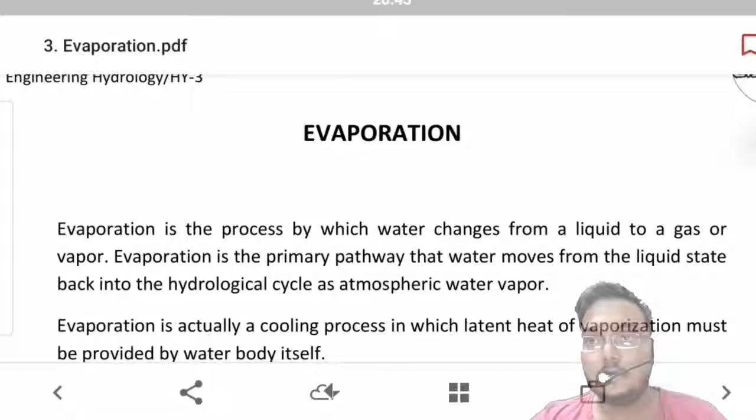This is the fourth part of the video, dealing with another topic of hydrology: evaporation. In the first video we started with an introduction to engineering hydrology, covering all the aspects dealt with in this field. In the second and third videos we studied precipitation and related topics. Now, in this fourth video, we will start a new topic: evaporation.

Evaporation is the process by which water changes from liquid to gas or vapor. Water from any surface water body will try to convert itself from the liquid form into vapor form, rising up to the atmosphere to form clouds. This is our process of evaporation, by which water changes from a liquid to a gas or vapor.

Evaporation is the primary pathway by which water moves from the liquid state back into the hydrological cycle as atmospheric water vapor. Out of all the methods by which water can transform from liquid to vapor into the hydrological cycle, evaporation is the primary one. It can also occur through other processes like transpiration, but evaporation is considered primary because it occurs mostly and in large volume.

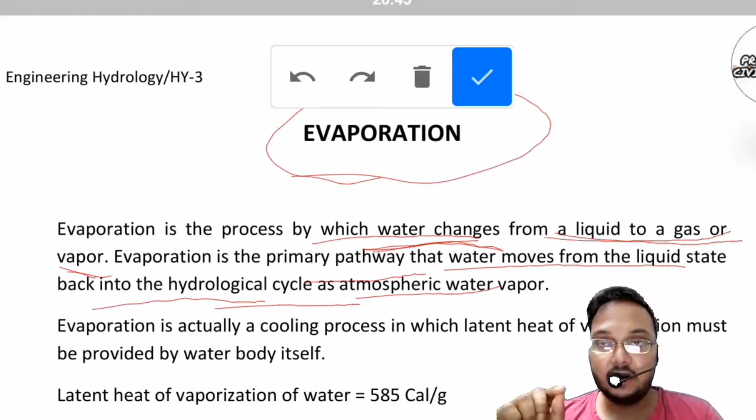Evaporation is actually a cooling process, in which the latent heat of vaporization must be provided by the water body itself. This latent heat of vaporization helps the conversion take place from liquid water to water vapor. That latent heat allows the conversion from the liquid state to the gaseous state, and this latent heat is provided by the water body itself.

The latent heat of vaporization of water is 585 calories per gram. You can remember this value.

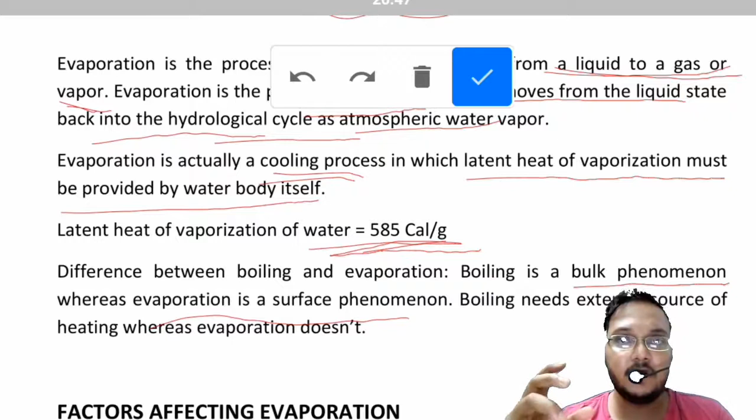The difference between boiling and evaporation is that boiling is a bulk phenomenon - it occurs as a whole. If you put a vessel full of water on a gas oven and light it up, the whole system will be exposed to boiling. Whereas for evaporation, it is a surface phenomenon - it's not that the whole of the ocean water starts evaporating; it only occurs at the surface. For boiling, it occurs in the whole vessel, in all the water present in it. So boiling is a bulk phenomenon, whereas evaporation works only on the surface.

Boiling needs an external source of heating, whereas evaporation doesn't. In boiling, some external heat is required - you need to light up something beneath the vessel so that the water starts boiling. Without that fire, you cannot start the boiling process. Even if you use an induction oven instead of fire, you need to set the right temperature and supply heat from the pan so that boiling takes place in the vessel. But for evaporation, we don't need any source of heat - no external heating is required. You may say that evaporation occurs because of the sun.

No, it's not the right thing. Evaporation also occurs in the night time, not only in the daytime. Even at night, if we keep our clothes for drying outside on our terrace or somewhere, that drying will take place at night too, irrespective of whether the sun is present or not. That evaporation process will also occur.

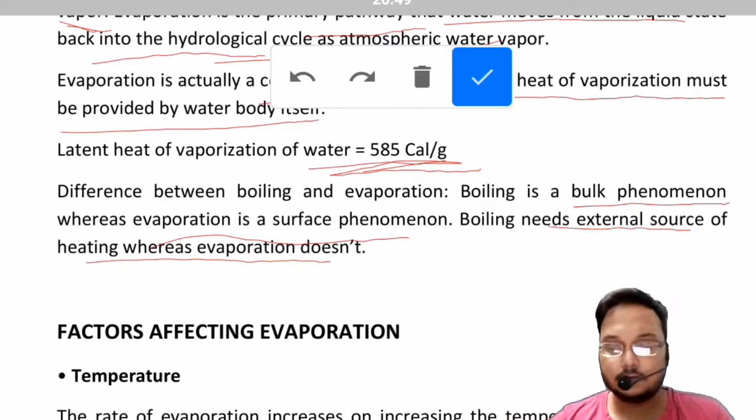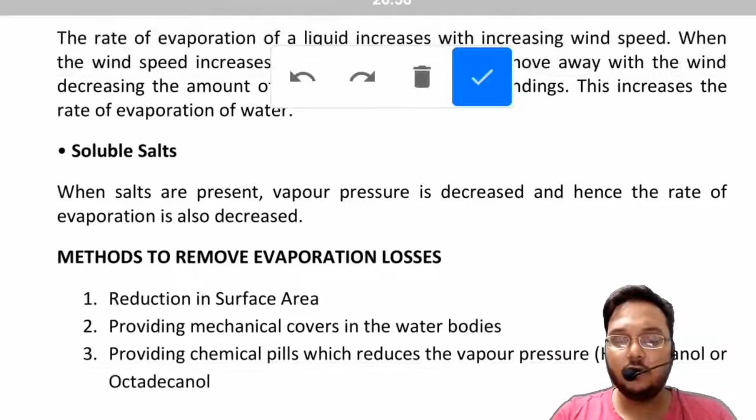So next we discuss the factors affecting evaporation. The factors that affect evaporation are the temperature, surface area of the liquid, humidity of the air, wind speed, and some soluble salts. You should remember these 5 factors which will actually affect the evaporation. How will they affect it? Now let us read about them in detail.

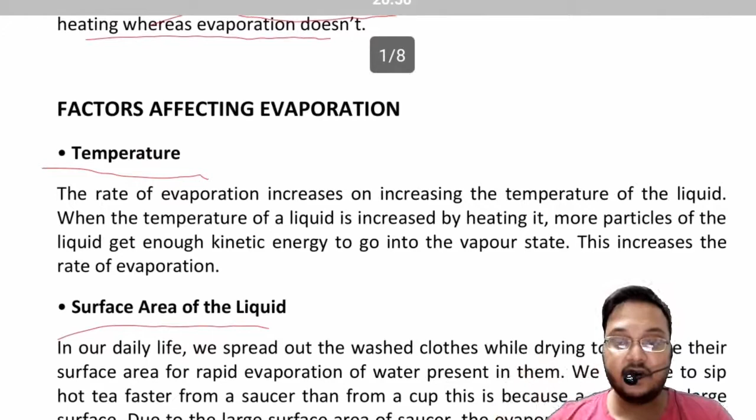For temperature, the rate of evaporation increases with increasing temperature of the liquid. So if you increase the temperature of the liquid, the rate of evaporation will increase. Just as I said, in the daytime the rate of evaporation is higher compared to night time. Evaporation occurs in both day and night, but it occurs more in the daytime because we have an external heating source, the sun.

When the temperature of a liquid is increased by heating it, more particles of the liquid get enough kinetic energy to get into the vapor state. As you know from school chemistry, we need to provide some kinetic energy to convert a liquid form to the gaseous form. Gaseous forms have higher kinetic energy, but due to the heating, the particles will already have some kinetic energy.

So just a little bit of heating will lead to much more evaporation compared to what happens in the absence of heating or at a lower temperature. The presence of high temperature will imbibe a little bit of kinetic energy, so that the particles can easily go to the gas state, and that amount of kinetic energy is easily achievable for the particles of that liquid. So temperature gives kinetic energy to the particles.

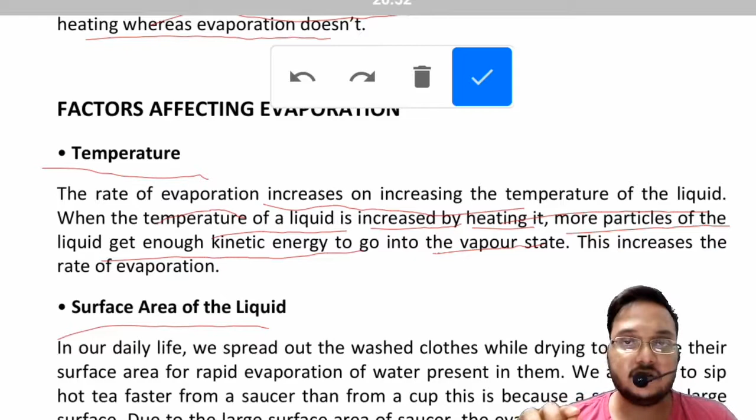Next is the surface area of the liquid. In our daily life we spread out washed clothes to increase their surface area for rapid evaporation of water present in them. We are able to sip hot tea faster from a saucer than from a cup. This is because a saucer has a larger surface, and due to this larger surface, the evaporation of hot tea from the saucer is faster.

We conclude that the rate of evaporation of a liquid can be increased by increasing the surface area of the liquid. So you got two examples: if we spread out our washed clothes, they will dry up quickly. It's not like you just keep them jumbled in one place, not spread out properly, and expect them to dry faster. No, that won't happen. To make the cloth dry faster, you need to spread it out.

Also, if you take hot tea in a cup, you will feel the heat. But if you pour the same tea into a saucer, a plate, or a china dish, and try to drink the tea from that saucer or plate, you will see it is easier for you and you will feel less heat. This is because with more surface area, more will be the rate of evaporation.

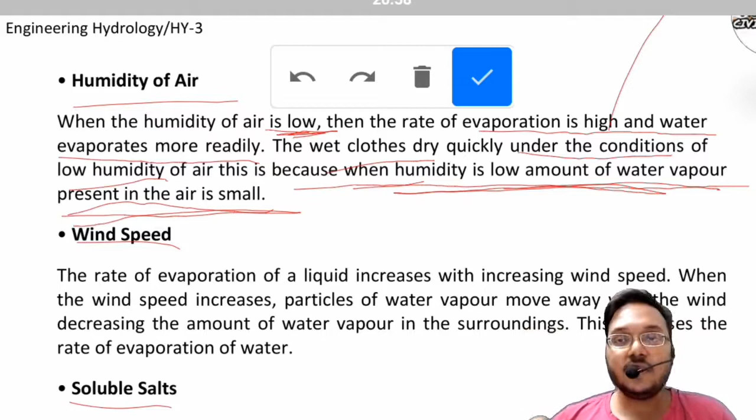Next is the wind speed.

The rate of evaporation of a liquid increases with the increase of wind speed. So if the wind speed increases, the rate of evaporation will also increase. When the wind speed increases, the particles of water vapor move away with the wind, decreasing the amount of water vapor in the surroundings, which increases the rate of evaporation.

Suppose some amount of evaporation is taking place in a particular region, and there is some good amount of wind flowing in that place. The evaporated water vapor won't be able to stay in the atmosphere for longer time, as the wind will blow it away. The higher the speed of wind, the higher the amount of water vapor blown away. So when the water vapor is blown away, the atmosphere will again be vacant, devoid of water vapor, so the evaporation process will continue.

But suppose the wind is blowing at a very low speed, like 1 to 3 kilometers per hour. What will happen? The water vapor coming to the atmosphere from evaporation will remain in that part of the atmosphere for a longer time. But if we have a wind speed of around 30-40 kilometers, a very windy day, that wind will blow away those water vapor particles, creating space again for new water vapor particles to take their place. So we will have more evaporation than would happen on a less windy day.

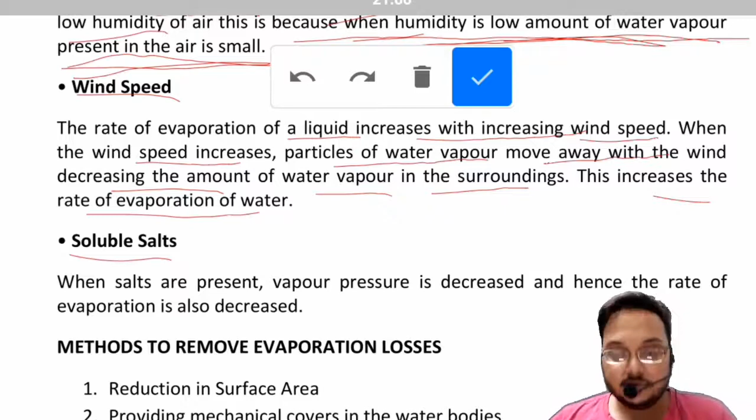Next is soluble salts. When salts are present, the vapor pressure is decreased, and hence the rate of evaporation is also decreased. So the presence of salt will decrease the vapor pressure, and thus the rate of evaporation will also get decreased.

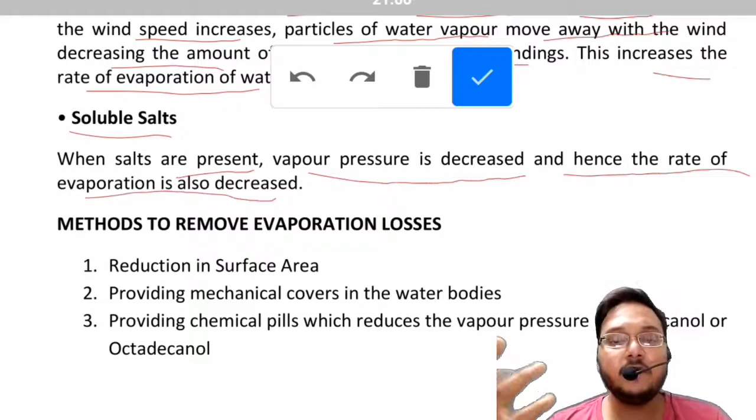The methods to remove evaporation losses are: either you reduce the surface area, as we have learned that more the surface area, more will be the evaporation taking place. So if we reduce the surface area, we can reduce the evaporation losses.

Next, providing mechanical cover for the water bodies. If we want to minimize evaporation loss from a very large water body, a huge amount of water vapor will get evaporated. So what we try to do is make an open tank in such a shape that the top part has less surface area compared to the bottom part.

Just like a frustum of a cone. If an open tank is made like a frustum of a cone, the top will have less area. I'll make a diagram of the frustum of a cone. This top part will have less surface area compared to the bottom, so less evaporation will take place from here. But if it was a cylindrical tank or a well, more evaporation will take place, as the surface area is more.

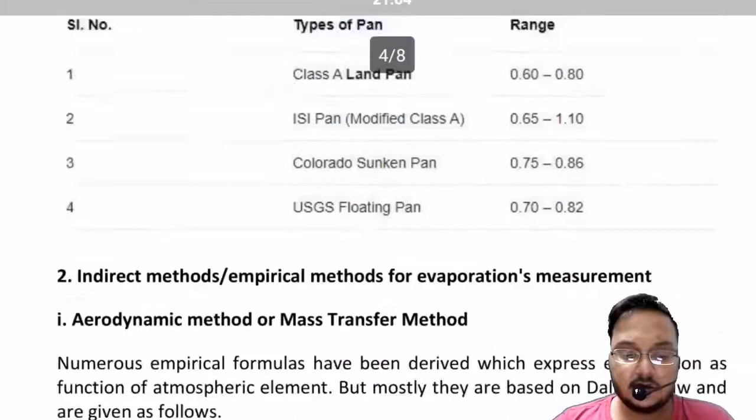The methods to determine the evaporation are as follows. The two methods for measurement of evaporation are the direct methods and indirect methods, and also there is one method, the empirical method. Let's make it three methods that will help us determine the amount of evaporation taking place.

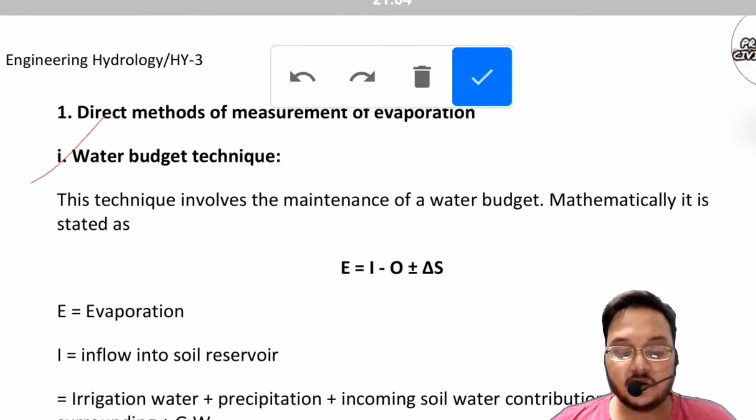We have this equation where E is equal to I minus O plus or minus delta S, where E is the evaporation.

I is the inflow into the soil reservoir, which is equal to irrigation water plus precipitation plus incoming soil water contribution from surrounding, plus the groundwater. So what all possible inflow can occur to a reservoir?

First is the irrigation water coming from irrigation sources. Secondly is the precipitation that is occurring. Next is the incoming soil water contribution - suppose some soil water is coming due to infiltration or groundwater runoff, also due to groundwater recharge. So these are the four ways that can be inflow to one soil reservoir.

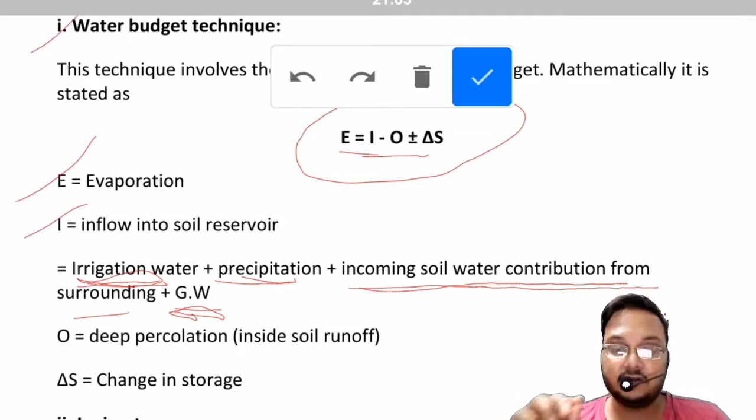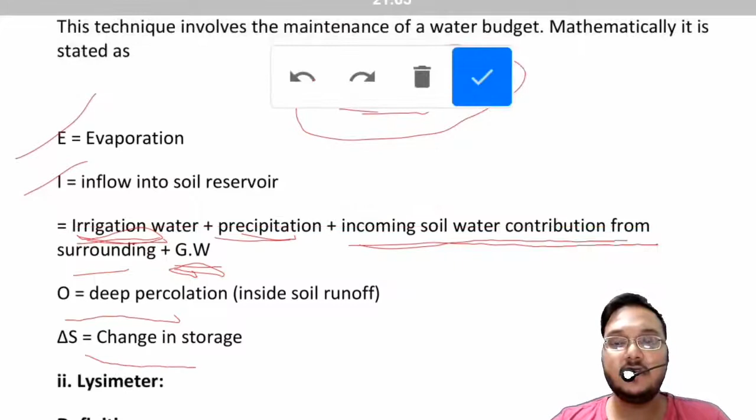So whenever a water resource engineer works on the inflow of a particular reservoir, he will consider all these factors. Next, O is the deep percolation, the inside soil runoff, and finally we have delta S, which means the change in storage, just as we did in the case of precipitation.

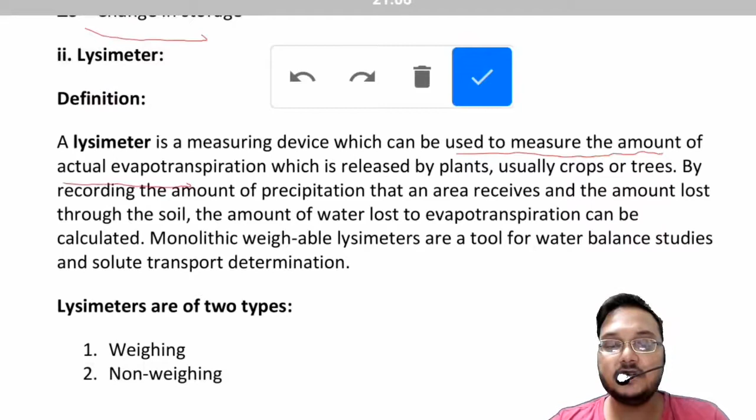Next is the lysimeter. A lysimeter is a measuring device which can be used to measure the amount of actual evapotranspiration which is released by plants, usually crops or trees. So this is a measuring device used to measure the amount of actual evapotranspiration occurring in a particular plant - mostly evapotranspiration occurs in plants only.

The plants are the only source of this evapotranspiration process. So what we do is provide a gadget known as a lysimeter, and we try to estimate the amount being evaporated by that particular plant.

By recording the amount of precipitation that an area receives and the amount lost through the soil, the amount of water lost to evapotranspiration can be calculated. So this is one way you can calculate it - the amount of precipitation, the amount of water remaining in the soil, and the difference will give you the water lost due to evapotranspiration.

The monolithic weighable lysimeters are a tool for water balance studies and solute transport determination. These are available commercially and are very useful for studying water balance and researches, and also solute transport determination. Lysimeters are of two types, the weighing type and the non-weighing type.

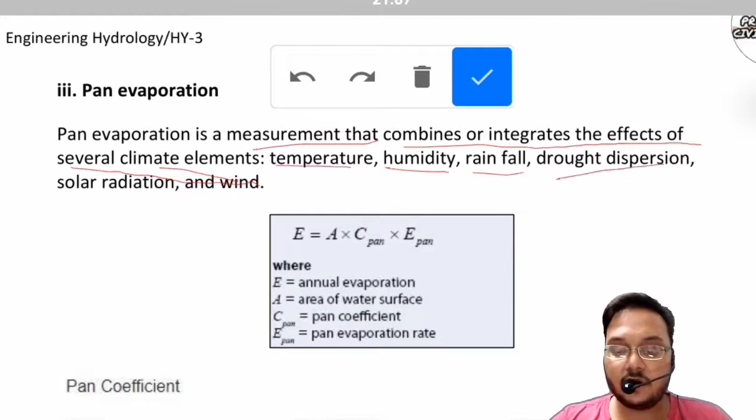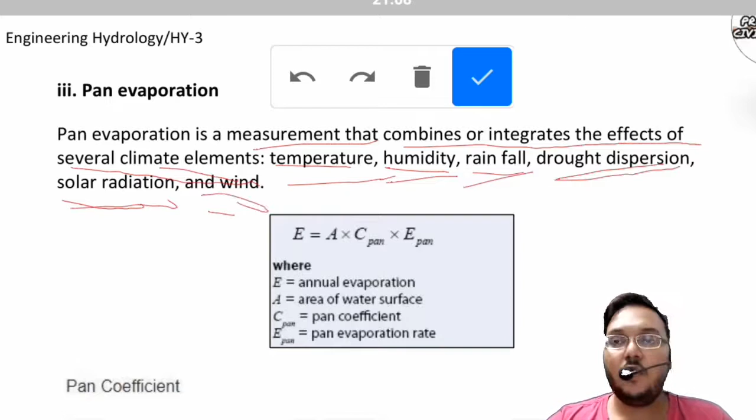Next is the pan evaporation. Pan evaporation is a measurement that combines or integrates the effects of several climate elements - temperature, humidity, rainfall, drought dispersion, solar radiation and wind. So pan evaporation is a technique where we try to combine the effects of these elements on a particular pan which has some amount of water.

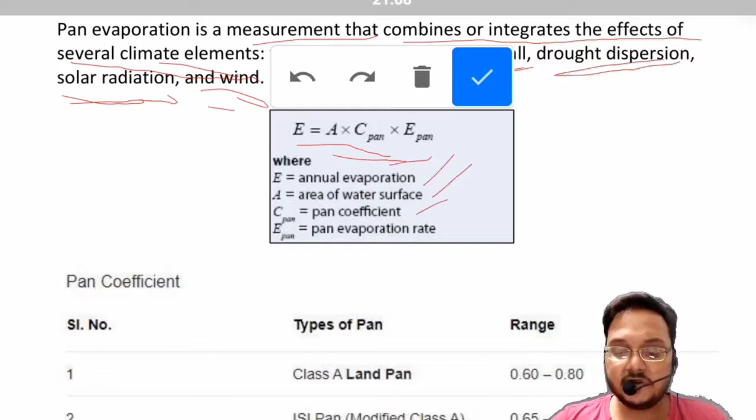We have this equation, E is equal to A multiplied by C pan multiplied by E pan, where E is the annual evaporation, A is the area of water surface, C pan is the pan coefficient, and E pan is the pan evaporation rate.

So how to denote the pan coefficient? You can see in the table: Class A pan or the land pan is 0.6 to 0.8. ISI pan modified class A is 0.65 to 1.1. Colorado sunken pan is 0.75 to 0.86. USGS floating pan is 0.7 to 0.82. So the type of pan you will be using will affect your pan coefficient.

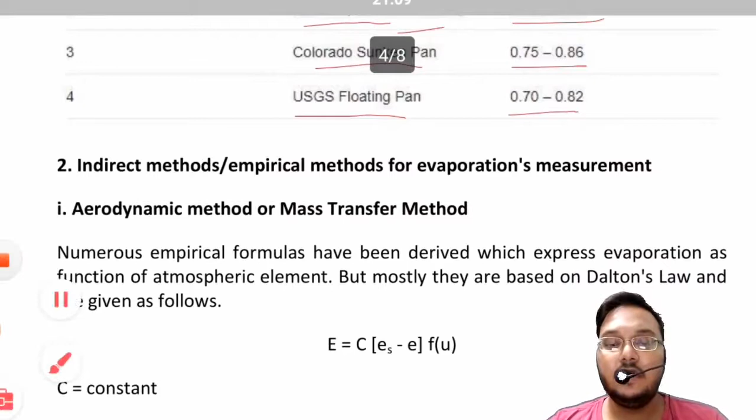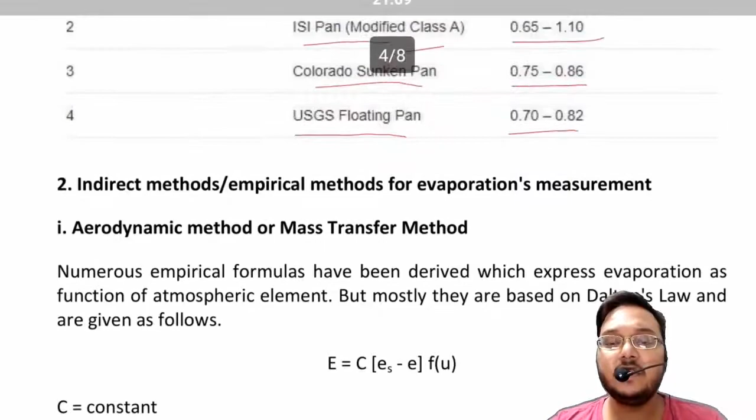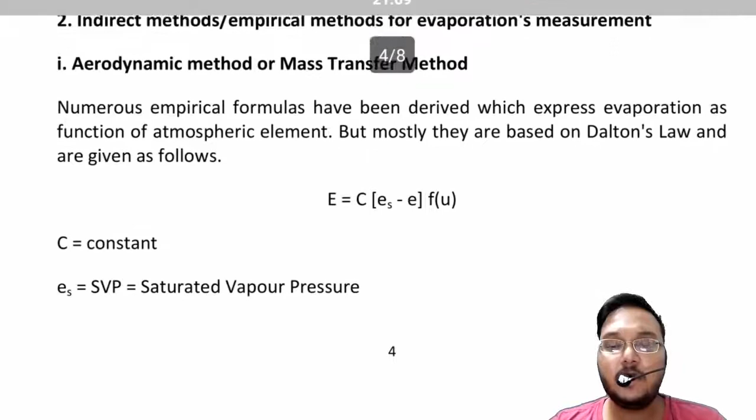Next is the indirect methods, also called the empirical methods for evaporation measurement. This includes the aerodynamic method or the mass transfer method, the energy budget method, the Penman equation, the Jensen-Haise method, and the Hargreaves method. Finally we will read about the empirical evaporation equation, which includes Meyer's formula and Rohwer's formula.

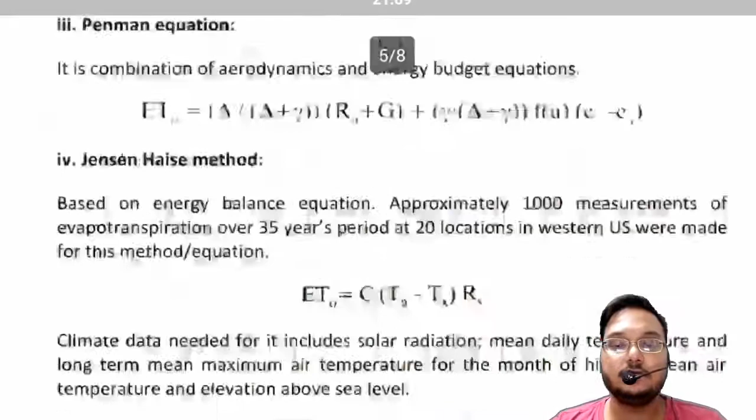Okay, so let's start with the aerodynamic and other empirical methods for evaporation measurement.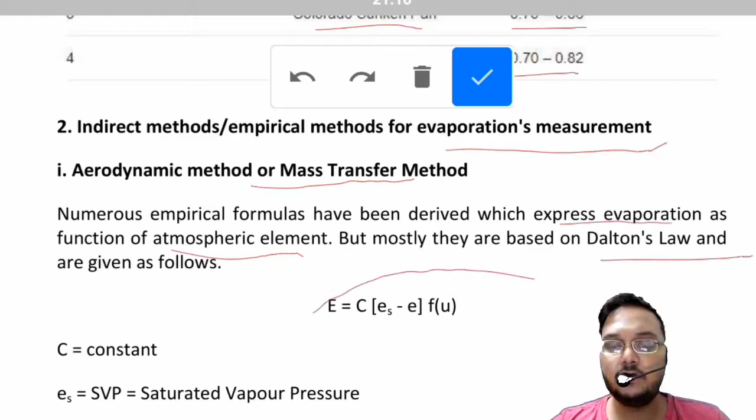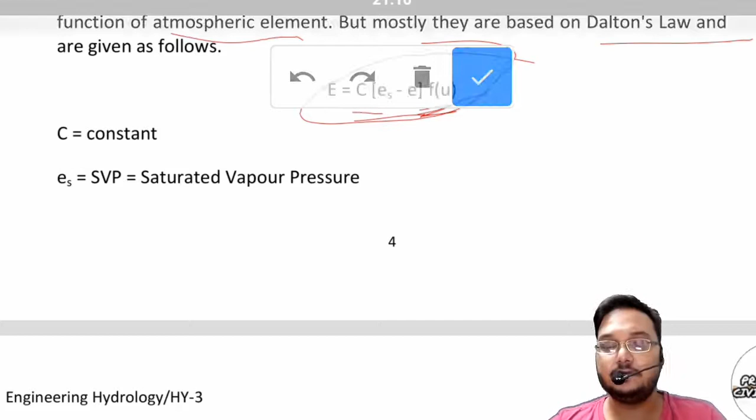First is the aerodynamic method or the mass transfer method. Numerous empirical formulas have been derived which express evaporation as a function of atmospheric conditions, but mostly they are based on Dalton's law, given as: E is equal to C(ES minus E) multiplied by f(u), where C is a constant, ES is the saturation vapor pressure, E is the actual vapor pressure, and U is the wind speed. So this is one such formula, the aerodynamic method, to denote the amount of evaporation.

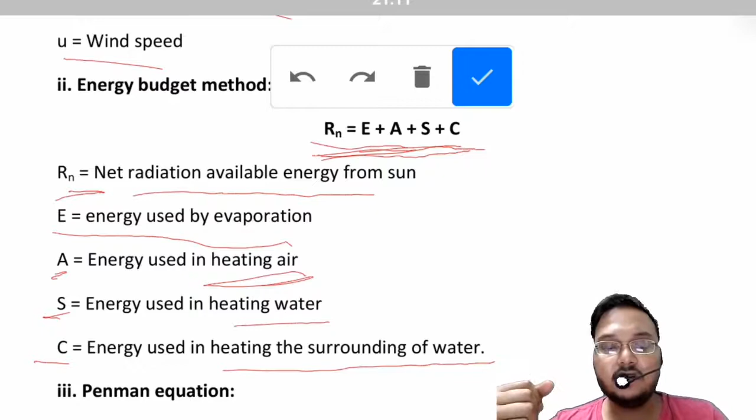Next is the energy budget method. Like the water budget method, we also have the energy budget method. Previously the water budget method was based on the balance of the flow of water. The energy budget method is the balance of the flow of energy. It occurs as Rn is equal to E plus A plus S plus C, remember it as EASC. Rn is the net available energy, the radiation from the sun. E is the energy due to evaporation, A is the heating of air, S is the energy used in heating water, and C is the energy used in heating the surroundings of water. These four things are used to denote the value of Rn. This was the energy budget method.

Next is the Penman equation. Penman is a scientist who developed this equation, a combination of the aerodynamic and energy budget equations, and it is somewhat like this. It's a complex form of equation.

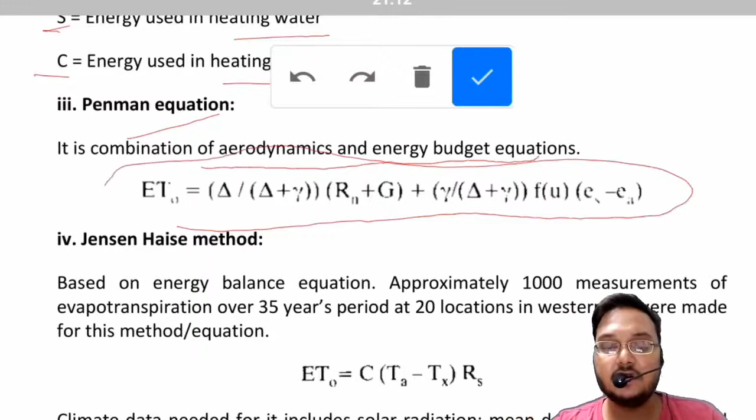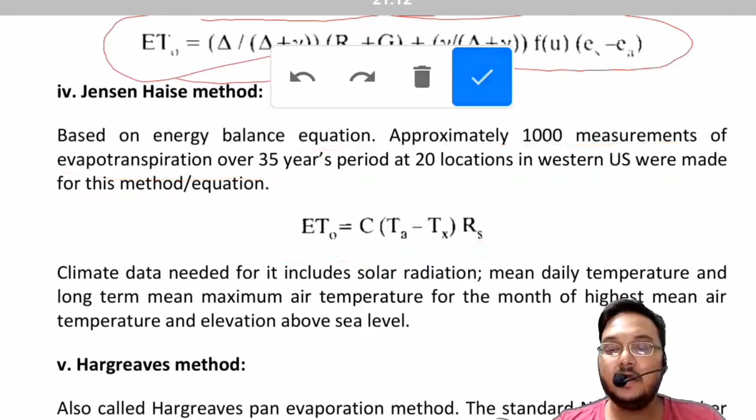Next is the Jensen-Haise method, based on the energy balance equation. Approximately 1000 measurements of evapotranspiration over a 35 year period at 20 locations in the western US were made for this method. The equation is: ETO is equal to C(TA minus TX) multiplied by RS. The climate data needed includes solar radiation, mean daily temperature, long-term maximum air temperature for the month of the highest mean air temperature, and elevation above sea level. So first you check which month has the highest mean air temperature, and in that month you check the solar radiation, mean daily temperature, and long-term maximum air temperature. Then you apply it in this formula and get the amount of evaporation taking place.

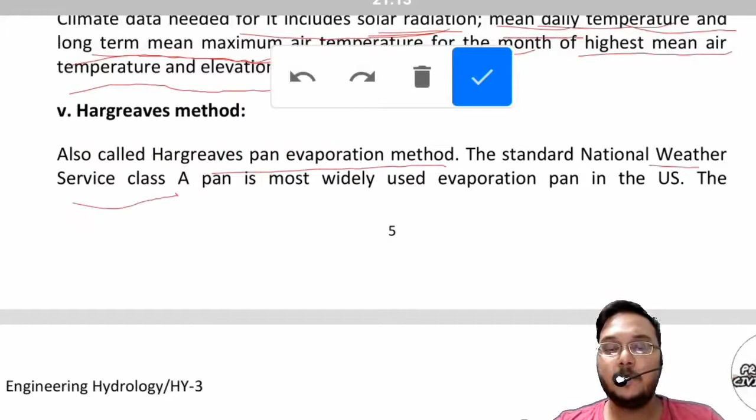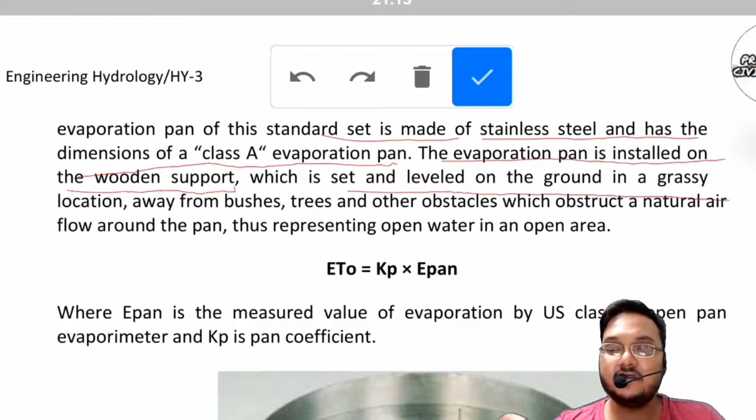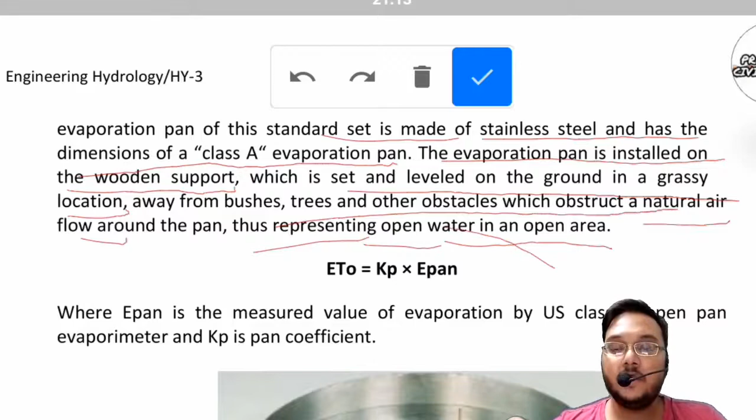Next is the Hargreaves method, also called the Hargreaves pan evaporation method. The standard National Weather Service Class A pan is the most widely used evaporation pan in the US. This evaporation pan is made of stainless steel with standard dimensions. It is installed on a wooden support, set and leveled on the ground in a grassy location, away from bushes, trees and other obstacles that obstruct natural air flow through the pan, thus representing open water in an open area. So ET is equal to Kp multiplied by Epan, where Epan is the measured value of evaporation by the US Class A open pan evaporimeter, and Kp is the pan coefficient.

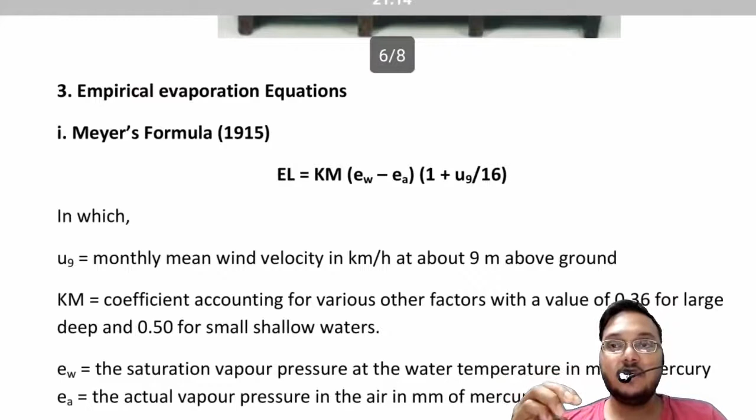Finally is the empirical evaporation equation. Previously these were also some empirical methods, but those are indirect methods. The third type is the purely empirical evaporation equations, referred to as empirical because they are mostly derived from experimental works.

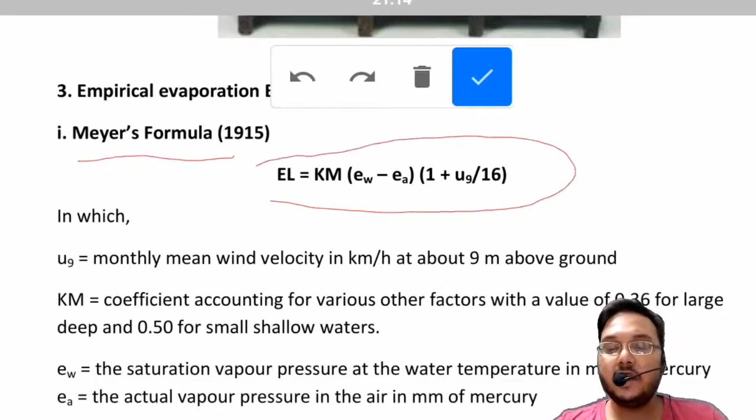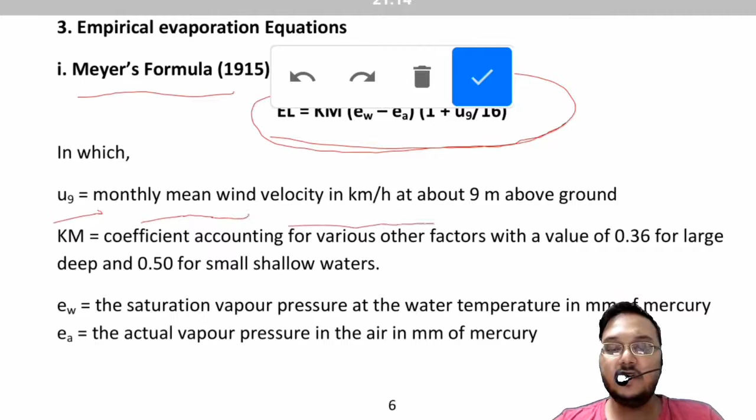First is Meyer's formula, given by EL is equal to Km(EW minus EA) multiplied by (1 plus U9 upon 16). What are the notations? U9 is the monthly mean wind velocity in km per hour at about 9 meters above the ground, whereas Km is the coefficient accounting for various other factors, with a value of 0.36 for large deep waters and 0.5 for small shallow waters. EW is the saturation vapor pressure at the water temperature in mm of mercury, and EA is the actual vapor pressure in the air in mm of mercury.

Next is the Rohwer's formula. The Rohwer's formula is EL equal to 0.771 multiplied by 1.465 minus 0.000732 PA multiplied by 0.44 plus 0.0733 U naught multiplied by EW minus EA.

So this is quite a typical clumsy formula, but you need to remember it if the question asks you to solve using Rohwer's formula. So the question comes by using this method only, and you have to use this particular formula. So try to make a sequence and mug it up in a nice way, write it up so that you remember it all the time.

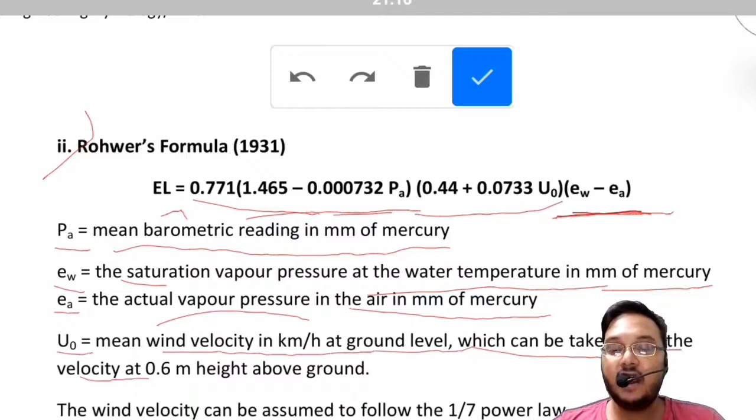PA is the mean barometric reading in mm of mercury. EW is the saturation vapor pressure at the water temperature in mm of mercury. EA is the actual vapor pressure in the air in mm of mercury, and U naught is the mean wind velocity in km per hour at ground level, which can be taken to be the velocity at 0.6 meter height above the ground.

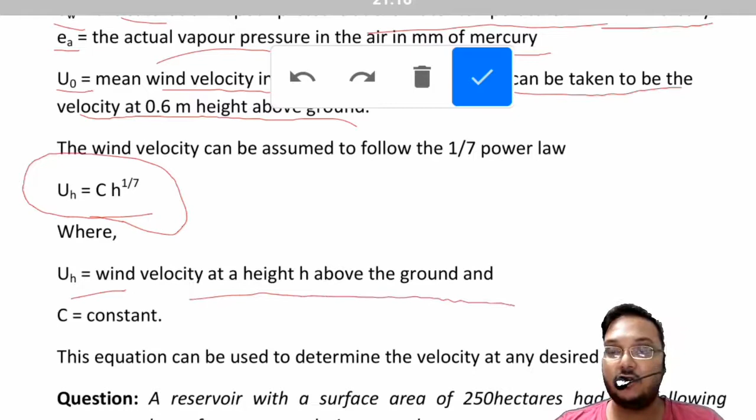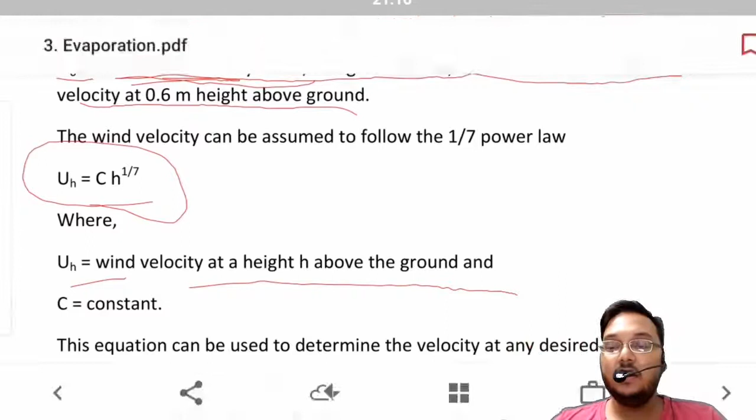Also, the wind velocity UH will be given by C multiplied by H to the power 1 by 7, where UH is the wind velocity at height H. U naught was the mean wind velocity in km per hour, whereas UH is the wind velocity at a particular height H, and that UH can be obtained by C multiplied by H to the power 1 by 7, where C is a particular constant. So this equation can be used to determine the velocity at any desired level.

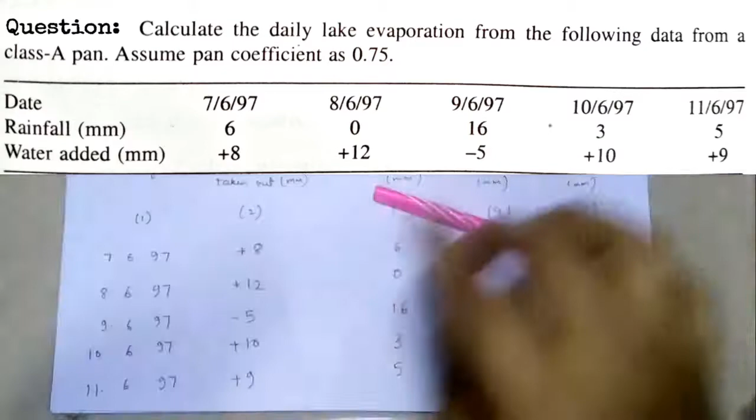To study about the numericals related to the evaporation chapter, let us read our first question. The first question says calculate the daily lake evaporation from the following data from a class A pan. Assume pan coefficient as 0.75, and we are given the table where we have the date, the daily rainfall, and the water added. Water is being added in the first 2 days, that is 8 and 12, represented with a plus symbol, whereas it is being subtracted on the 3rd day, so it is -5. So you can say it's not water added, it is water taken out.

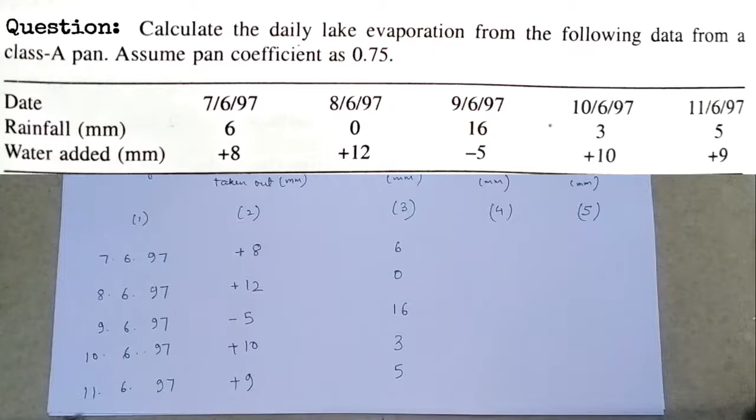So to do this problem, first let me tell you that the daily pan evaporation is equal to the sum of the rainfall plus or minus the water added. Why minus? If the water is taken out, then it will be a minus, and if the water is added, it will be a plus.

So in this case, for day 1 I have written the table like this, which was horizontal in the question. I have represented it vertically, and I have written the data already given in the question in black ink - the days, the water added, and the rainfall. Just for the first day, on 7/6/97 the water added is +8, whereas the rainfall is 6 mm.

So the pan evaporation for that day will be the sum of rainfall and water added, column 2 plus column 3. So it will be 8 plus 6 equal to 14 mm. For the second day it will be 12 plus 0, equal to 12. For the third day it will be 16 minus 5, as it is minus, water is being taken out, so it will be 16 minus 5, that is 11. For the fourth day it will be 10 plus 3, 13, and for the fifth day it will be 9 plus 5, 14.

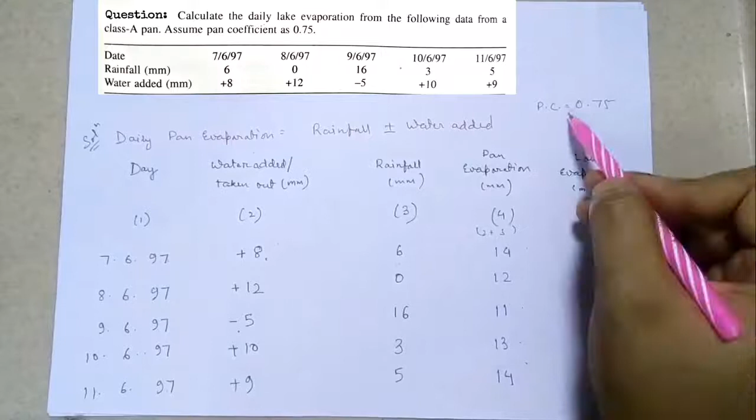So this was all about my daily pan evaporation, and I have represented them in the fourth column. The fifth column says about lake evaporation. The lake evaporation will be equal to the pan coefficient multiplied by the pan evaporation. The pan coefficient is given to us as 0.75.

So if I multiply 0.75 with 14, that is the pan evaporation of day 1, it will be equal to 10.50. So I can say that 10.50 is the lake evaporation for day 1, as lake evaporation is the product of the pan coefficient and pan evaporation.

Next, for the second day the lake evaporation will be 0.75 multiplied by 12, equal to 9. For the third day it will be 0.75 multiplied by 11, equal to 8.25. For the fourth day, 0.75 multiplied by 13, it will be 9.75, and for the fifth day, 0.75 multiplied by 14, again it will be 10.50. So this is how we get the lake evaporation, provided we are given the pan coefficient and the data which says what amount of water is added or taken out, or what is the rainfall for that particular day.

So let's move on to the next question. A reservoir with a surface area of 300 hectares has the following average meteorological values during a given week.

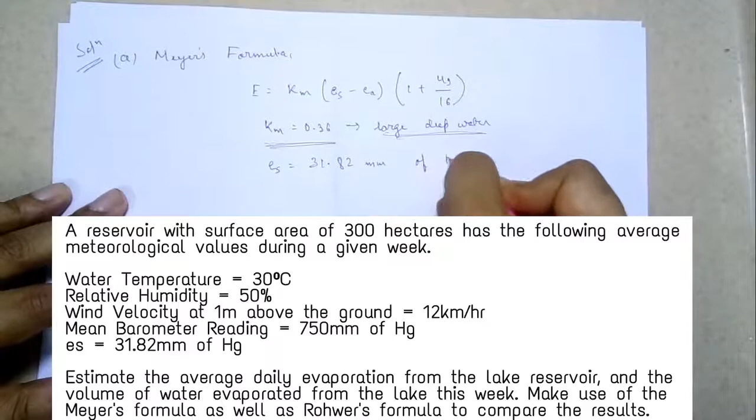Es is the saturation vapor pressure at 30 degrees centigrade. It is given as 31.82 millimeter of Hg, that is mercury.

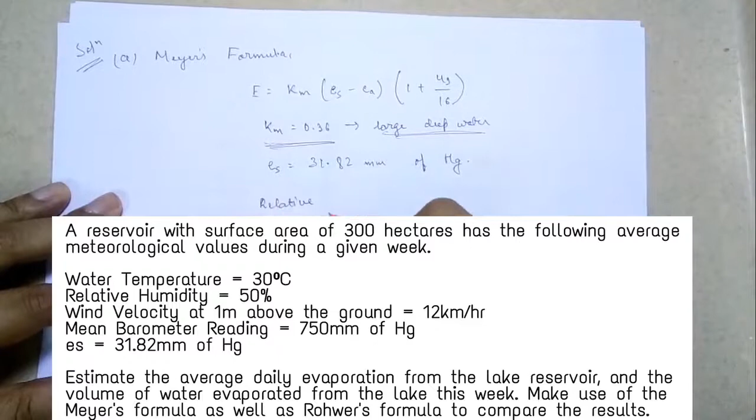The relative humidity is given by Es upon Ea, and it is 50% according to the question. Es is 31.82 and relative humidity is given as 50%.

Therefore Ea is equal to 31.82 divided by 0.5, multiplied by 100, and it is equal to 15.91 millimeter of mercury. So 15.91 millimeter of mercury is the value of Ea.

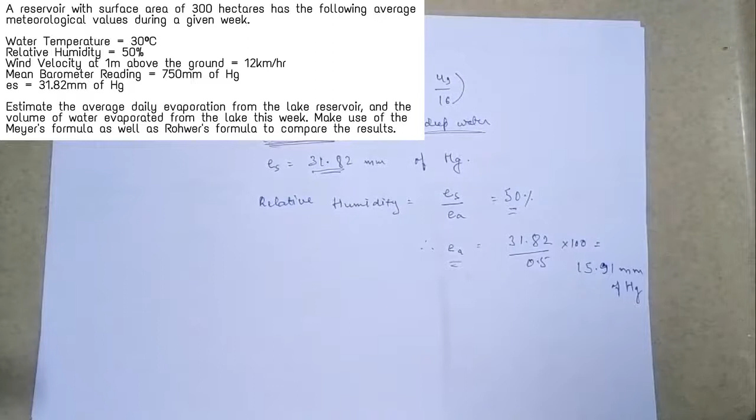So the relative humidity is 50%, Ea is given to us as 15.91 and Es is 31.82. Now, with Es and Ea values with us, next we will calculate the value of U9.

To get the value of U9, it is U9 upon V1 equal to 9 by 1 to the power 0.143. So U9 will be equal to 9 to the power 0.143 multiplied by V1, which is 12 km per hour.

So the answer will be equal to 16.43 km per hour. This is the value of U9. U9 is equal to 16.43 km per hour.

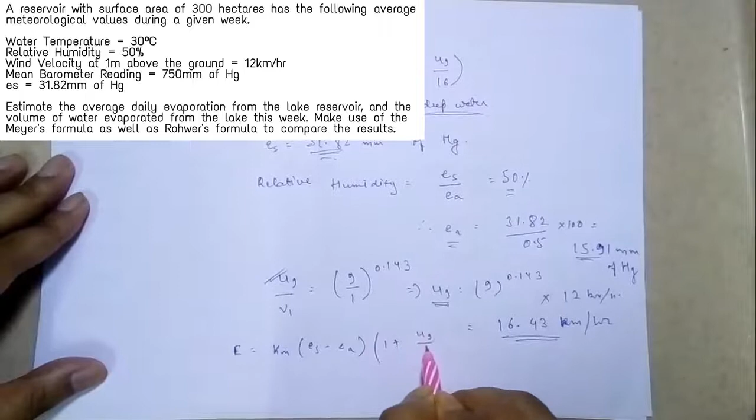So to get the value of evaporation, E is equal to Km, Es minus Ea, multiplied by 1 plus U9 by 16. This is given by 0.36 multiplied by 31.82 minus 15.91, multiplied by 1 plus 16.43 upon 16. This is our formula for E.

So by this, the value of E will be equal to 11.61 millimeter per day. This is the value of evaporation for 1 day only. For a week, to get the value of evaporation, you have to multiply by the number of days in the week, and also multiply by the area of that particular place.

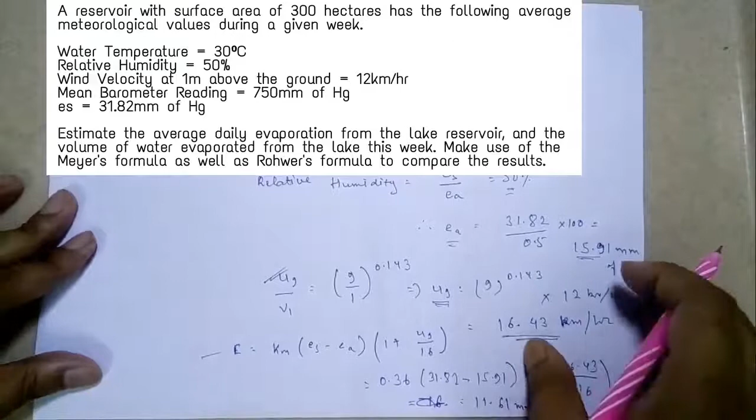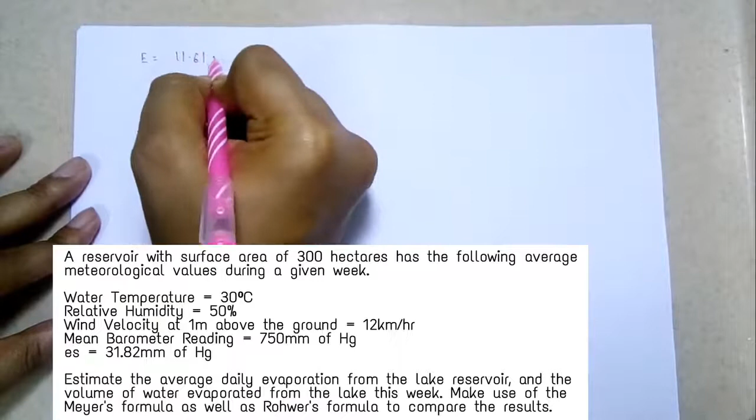So then only you will get the total volume of evaporation occurring. So the rate of evaporation is given as 11.61 mm per day, and for 7 days and a 300 hectare large reservoir, it will be equal to...

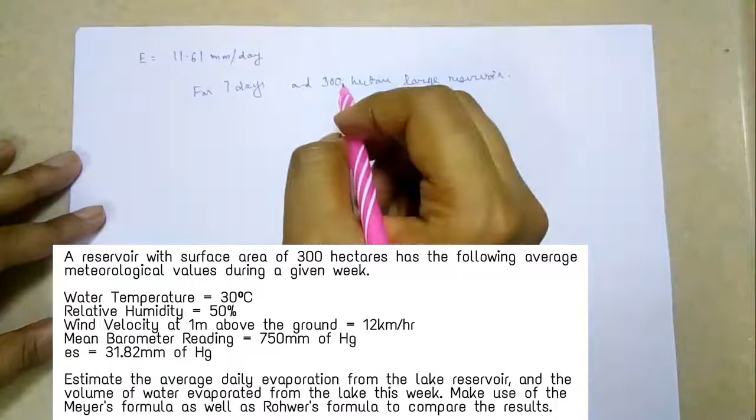11.61 is in millimeter, so to make it meter, it will be divided by 1000. So this is in meter now, multiplied by 7 days, and next multiplied by 300 hectares. Now 1 hectare is equal to 10 to the power 4 meter square.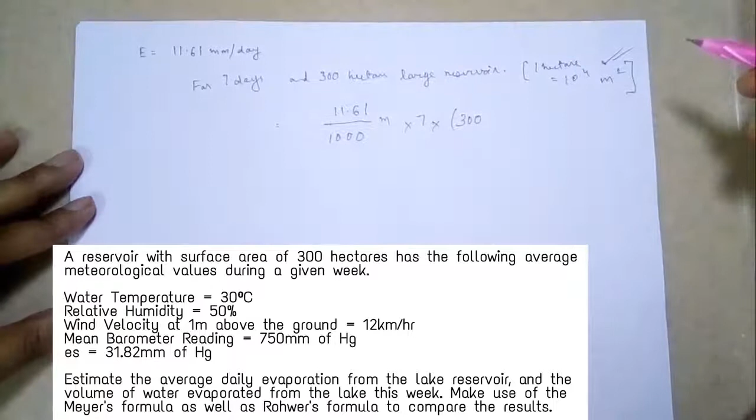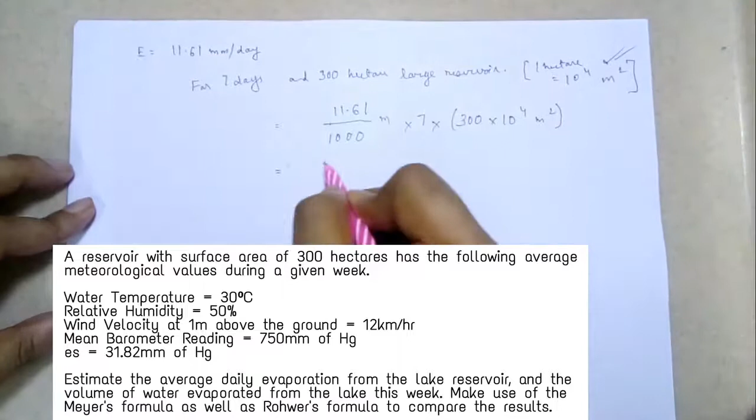So it will be equal to 300 multiplied by 10 to the power 4, in meter square. By multiplying this, we get the answer as 243,810 meter cube. This is the total volume of evaporation happening in that reservoir for 7 days, using the Meyer's formula.

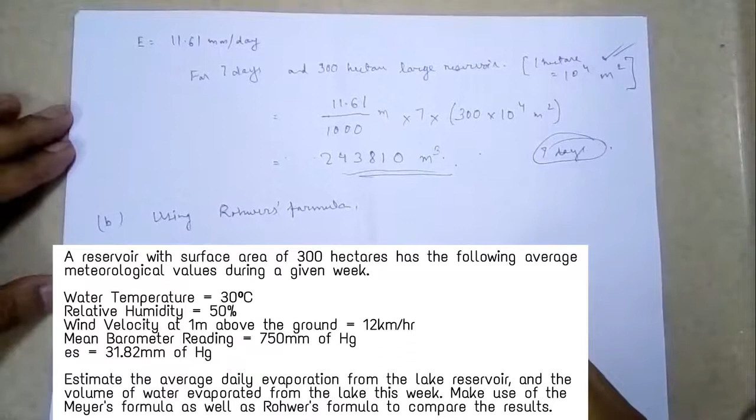Next is the Rohwer's formula, part B, using Rohwer's formula. So by using the Rohwer's formula, what is it? It is E is equal to

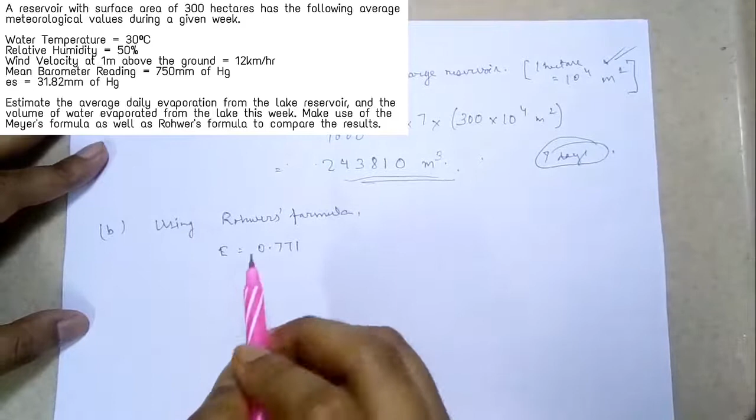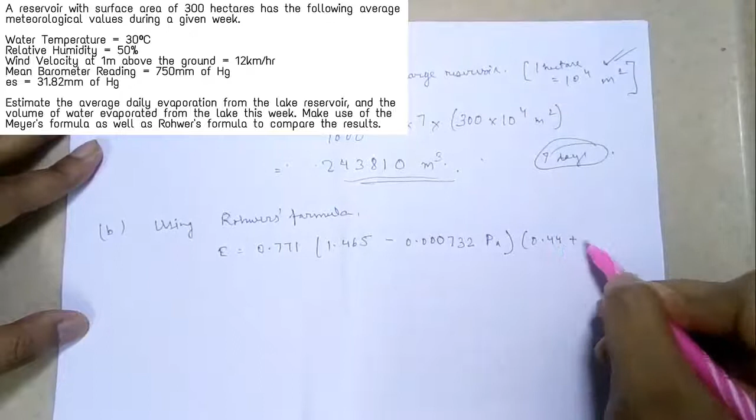0.771, multiplied by 1.465 minus 0.000732 PA, multiplied by 0.44 plus 0.0733 V0.6, this is V to the power 0.6, and that multiplied by ES minus EA.

So that's a very huge formula, and you know the value of ES, you know the value of EA. Now what we have to do is determine the value of V 0.6.

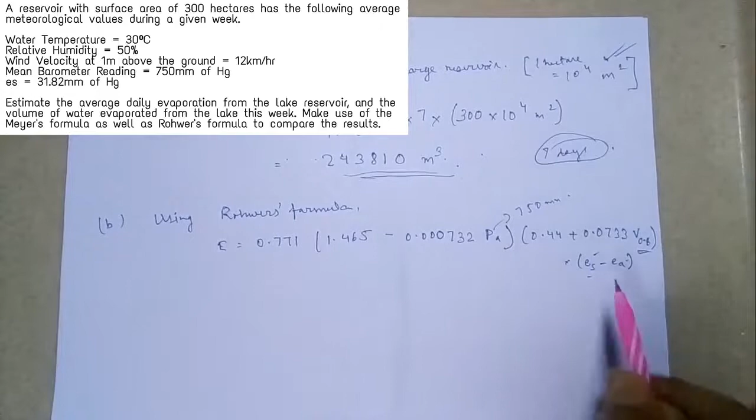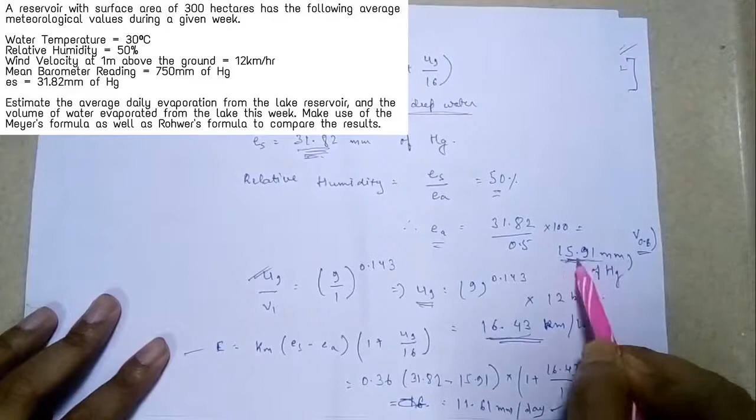Also the value of PA is known to us, that is the reading of the barometer, that is equal to 750 millimeter of mercury. ES is known to us, ES was equal to 31.82, and EA was equal to 15.91 millimeter of mercury. So ES, EA is known to us. PA is also known to us, that is 750 millimeter of mercury.

What we need to know is V 0.6, and V 0.6 can be obtained like this: V 0.6 upon V1 equal to 0.6 divided by 1, whole to the power 0.143, and V 0.6 will be equal to V1, as you know it's 12 km per hour.

12 multiplied by 0.6 to the power 0.143, and the value of V 0.6 is coming as 11.15 km per hour. So this is the value of V 0.6, 11.15 km per hour.

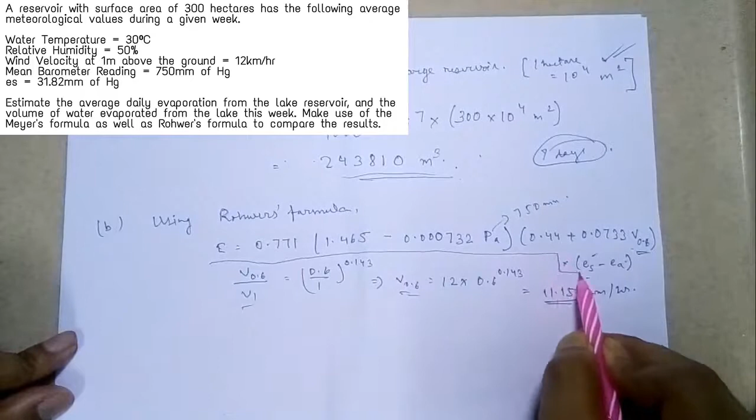This was our formula for E. So the next thing we need to do is calculate E. We need to calculate E, and E will be given by

0.771. Let's just directly substitute the values: 1.465 minus 0.000732, and PA is given by 750 millimeter of mercury, multiplied by 0.44 plus 0.0733, and V0.6 is equal to 11.15 km per hour, so we will write 11.15.

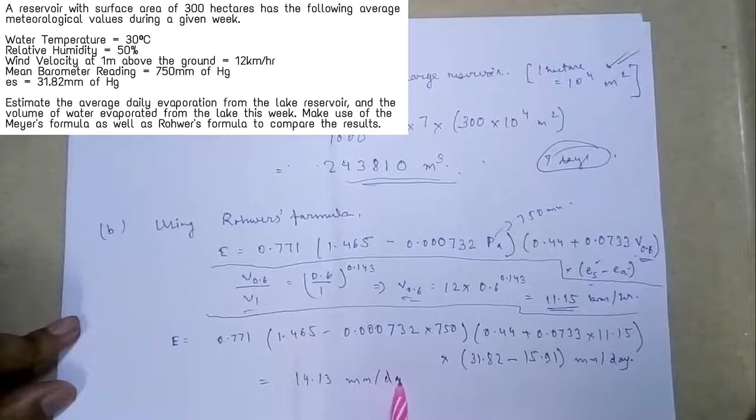Next is multiply it with ES minus EA, that is 31.82 minus EA which is 15.91, and this answer is in millimeter per day. So the answer will be equal to 14.13 millimeter per day.

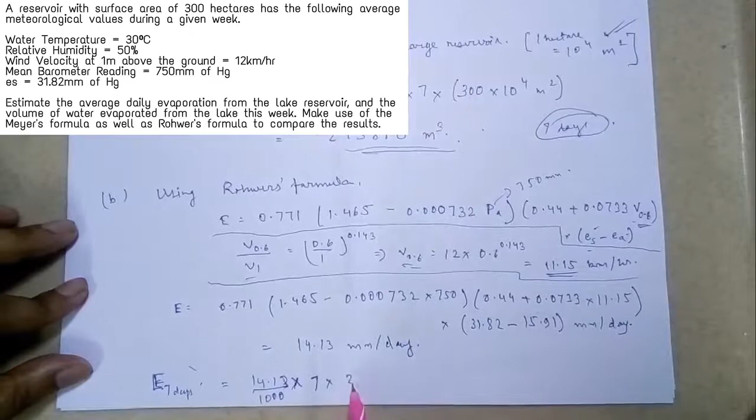To get the value for the whole week and for the whole reservoir, it will be E for 7 days, call it big E, suppose it is for the whole reservoir, and it is equal to 14.13 divided by 1000, we need to get it into meters, multiplied by 7, the number of days, and then I have to multiply it with the reservoir area, that is 300 multiplied by 10 to the power 4. So it will be equal to

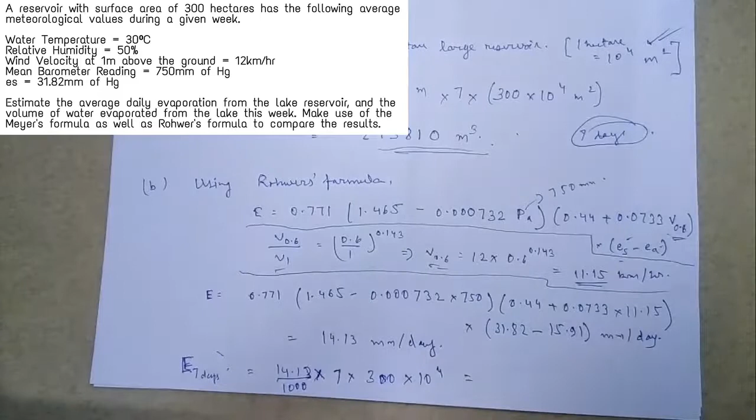So the answer is coming out to be around 296,730 meter cube. So this is by using the Rohwer's formula.

So just because the formulas are empirical and devised by two different persons, the values are quite different, but it is in general said that the one given by this Rohwer's formula somehow gives a more correct value, but I don't know if there is any such basis of comparison or not. Till then you might note down that these are the two different answers by using two different formulas.

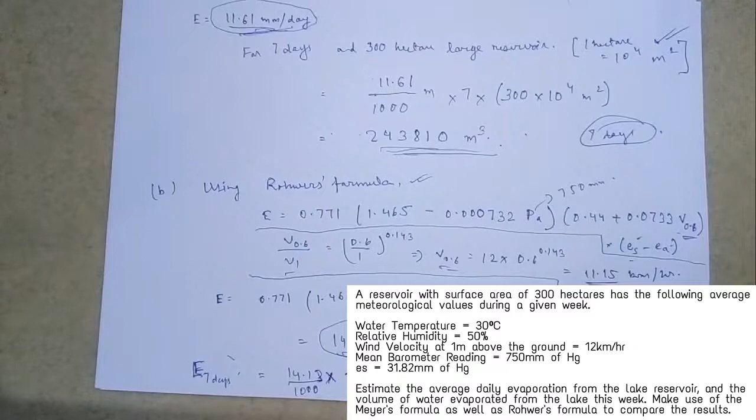Even the value that we get for per day, that is millimeter per day, for one day it is 14.13 millimeter per day, and using the Meyer's formula it is 11.61 millimeter per day. So the answer is varying by the two different methods. So we just got an idea that if we are using two different formulas, the answers will be different, because both of them are actually empirical formulas designed by scientists considering particular situations.